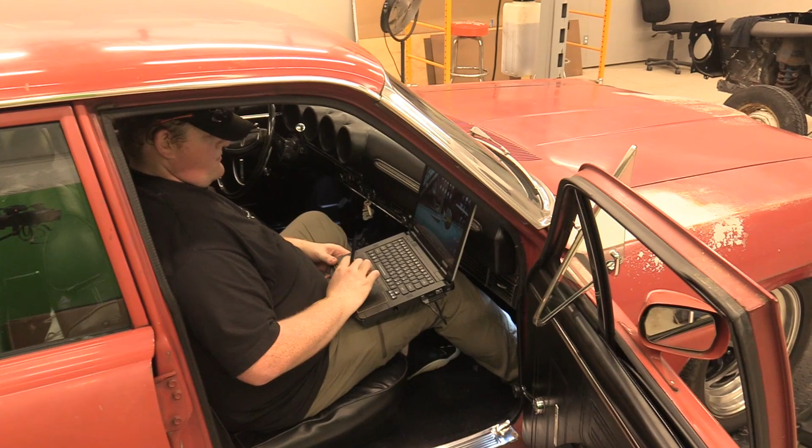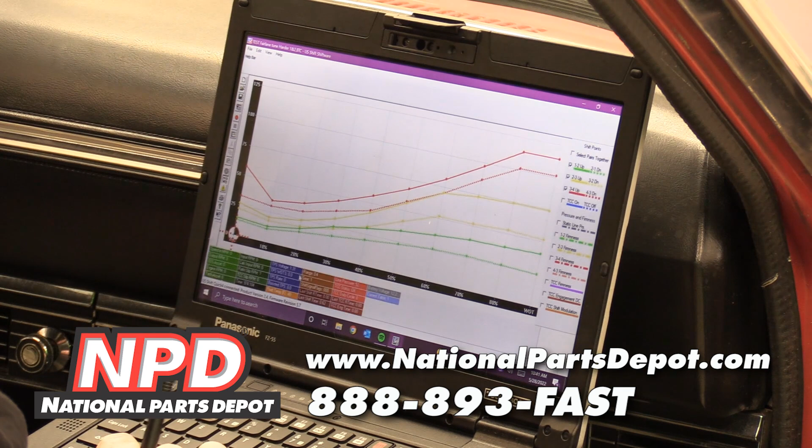All right, so I've driven it some more. It's kind of like a Cadillac. Yeah, it rides soft. It's like a cruiser right now.

Is there anything we can do to make that better? Already done. What? That easy. Holy cow, can you talk about this? I can try, I'll try to sound intelligent and talk about it. I don't know about the intelligent part, but can you talk about it? Yeah, I can talk about anything.

I already flashed you a new tune. It should make the better sounds, go faster.

I slapped the keyboard. Yeah, I saw you slapping the keyboard. I thought you were mad at it. Nah, you're doing a Hollywood thing, right? Yeah, I'm making the tune mad. It's gonna have a mad tune, it's gonna be nasty.

So what do you need, me to just pull it out on the counter here on the hood, or do you want to sit in the car? Let's go up to the hood. That'll be fine because you got enough cable, right? I don't need to hook to the cable. Okay cool, let's go.

All right, so I see line graphs. Yes. What am I seeing with line graphs? So these are your shift points at certain RPMs and throttle position. What's the order, is green first? Yeah, if you look on the right side you'll see a legend of all the lines, what each one means.

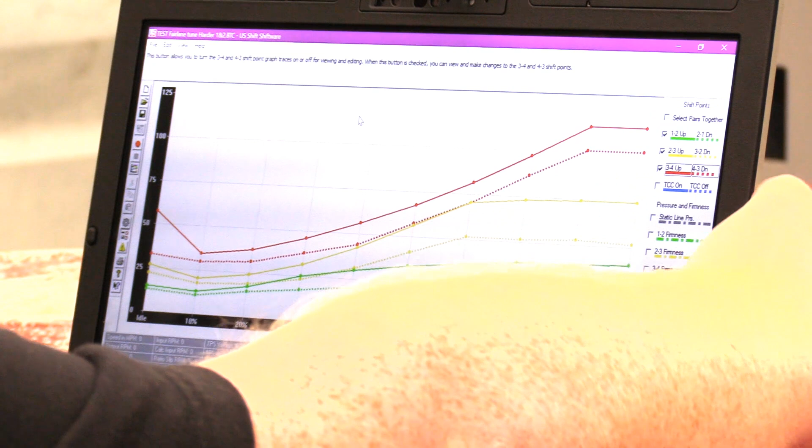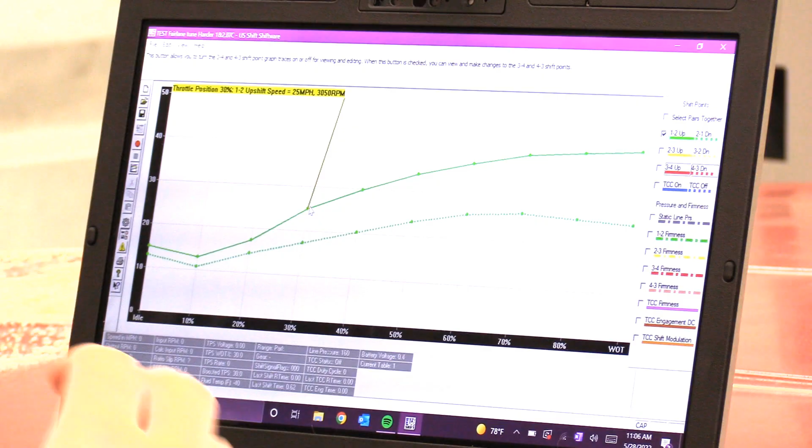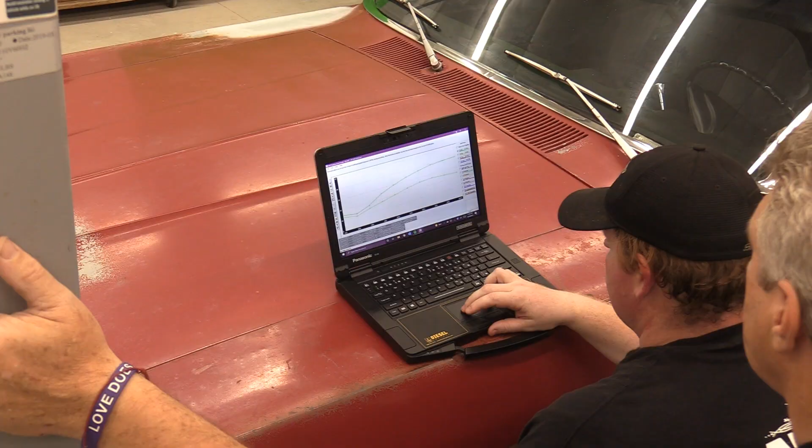Wait a minute, this thing doesn't come with preset tunes? It does, yeah, but it's a soft tune. So let's go ahead and pull up the original one. At 30% right now I've got it set to shift at 25 miles per hour, which is 3,050 RPM. So let's pull up the original tune and see where 30% is.

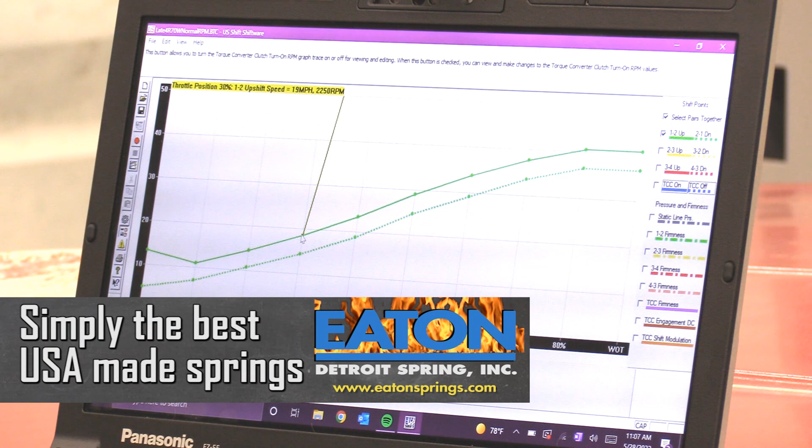All right, so at 30% it's shifting at 19, at 2250. So I moved it about 800 RPM up. And I did that with the entire line above 30%, and I just kept it linear, I didn't really do exponential.

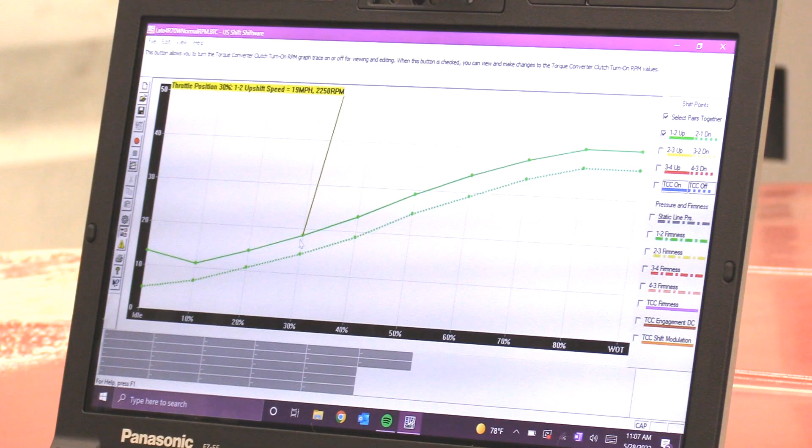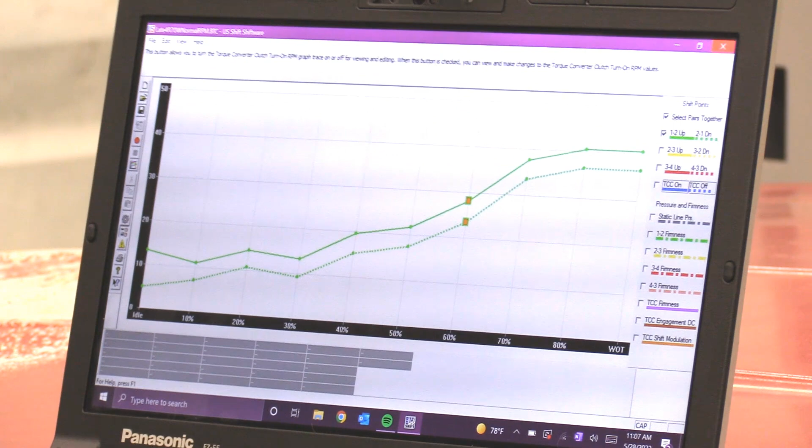An exponential line would be something along the lines of this, which would shift like absolute shit, but a line where it curves up steeply rather than straight across. Okay, don't do that, that's horrible.

But let me open up the old tune, well the new tune. And you can save as many of these in there as you want, right? Yeah, you can put as many tunes in, make as many copies of this as you want, make as many tables as you want. Well, the controller can have 4 tunes on it at once.

So you can have one safety tune, which is the factory tune, which is what I'd leave on there because we know it, and that's the Cadillac cushy tune. Yeah, and that's table 1, that just works.

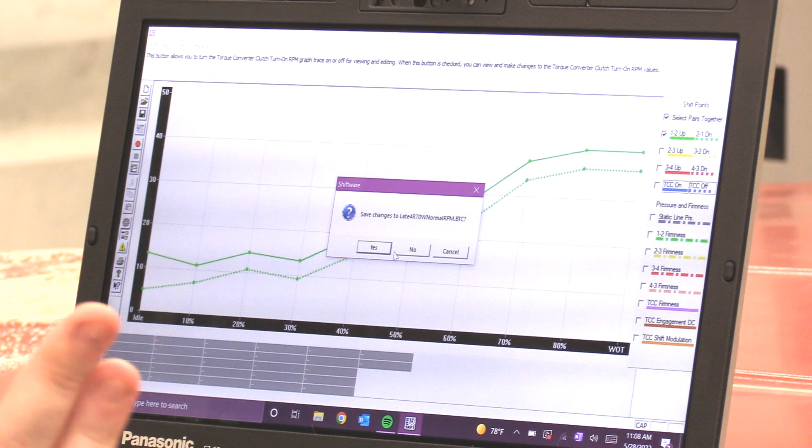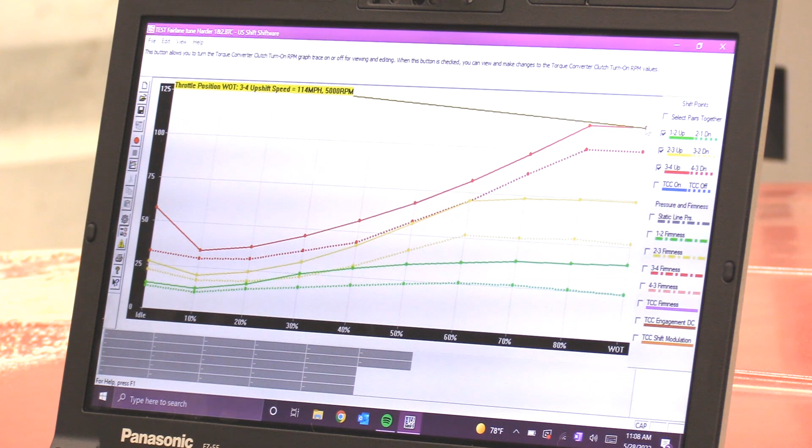But you could have semi-aggressive, really aggressive. They even have one in here that's a drag race tune that's basically- well, you can have drag race mode. Right, which you can ground a wire or do a couple other ways to trigger it, but that makes it shift only at the wide open settings. So you only want to use this doing a burnout or dragging it, which is really good for the clutch packs and all in the transmission, but not really good necessarily for the rest of the drive line.

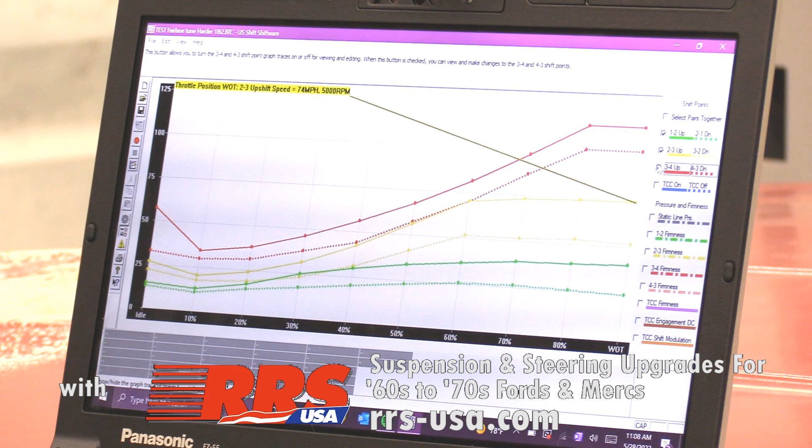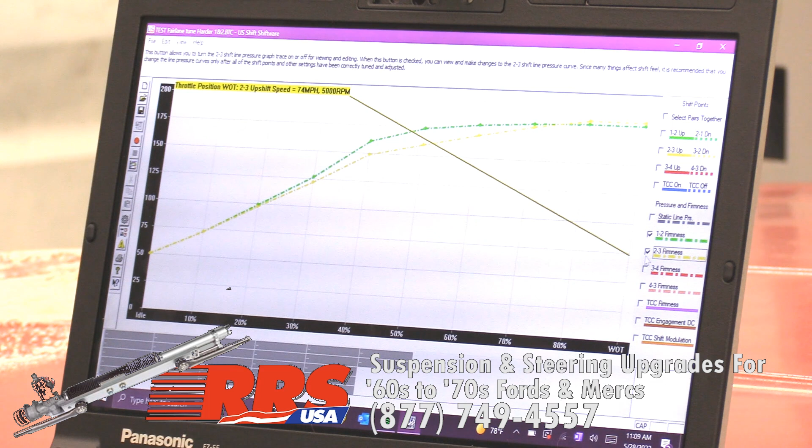Well, the clutch packs and everything, that actually comes in with the firmness. Right, so besides the upshift lines, you can also select 1-2 shift firmness, 2-3, and 3-4, and also downshift firmness. So I haven't really messed with this too much. This is what's commanding the line pressure while you're running. Right, the higher the line pressure, the harder the clutch engages, then the better for the transmission long term. The longer the clutch is meshed, the more wear, the more heat, and the more degradation to the clutch packs, which is why you want a little bit snappier shift in a performance car anyway.

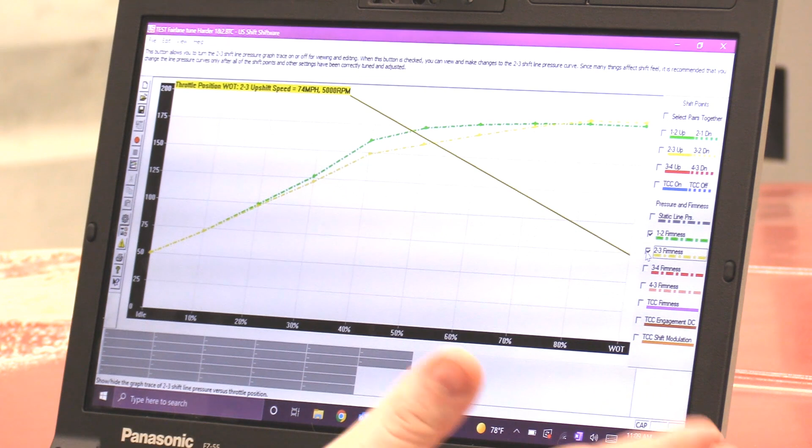You don't want it to feel, like I said, that's the only thing I don't really care for how it's set up right now, is just kind of a Cadillac shift. Yeah, so you can't even really tell. And the way I set this one up is I left 10 to 20% because when we were driving the other day, I noticed most of the cruising we were just around 10%.

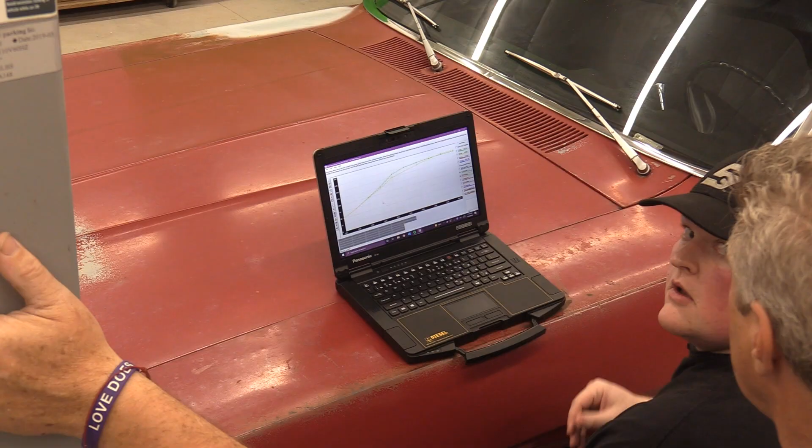So I want it to still be soft there and manageable, not super aggressive when you're just driving around. But whenever you nail it down, I moved above 30%, because that's really where you're trying to get into passing gear or take off the line and just get moving. So down low when you're just cruising around, it should operate just like the other one.

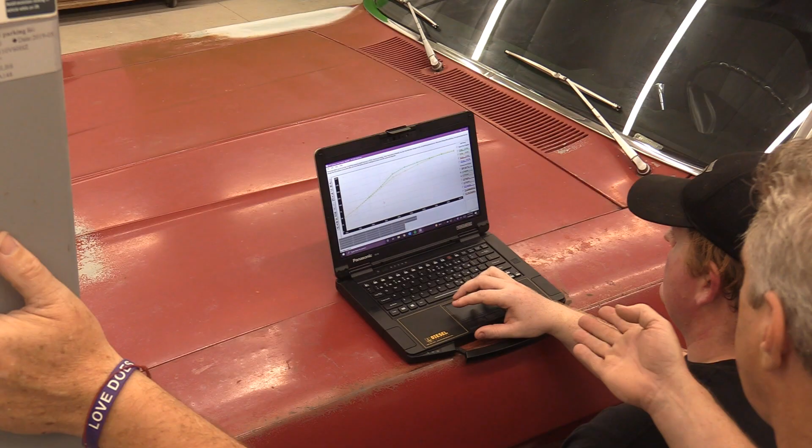Now, if a guy didn't want to go in and do his own tunes, could he go out and get tunes from US Shift, or are there other tunes offered within the program when you get it for your laptop? Yeah, whenever you download it, you get all of these. Pretty much every transmission that shift controller will cover is in here. There's different options for different transmissions. Most of the time for the 4R70W and the AODs and all that stuff, you only get RPM adjustments.

You have diesel, 5,000, 5,500, and 6,000. So a diesel tune is going to be shifting around 3,000 RPM, then 5,000, 5,500, 6,000. That's really cool, so you can set it up by RPM if you're wanting something more performance oriented. With a higher revving engine like this one, you'd want to go with a little more RPM because it's a Cleveland. Now it's got the 2V Aussie heads on it, so it's not as bad as a 4V Cleveland. Yeah, you need to get more RPM out of it to get more performance, since there's a mid-range, high-range power band in this engine.

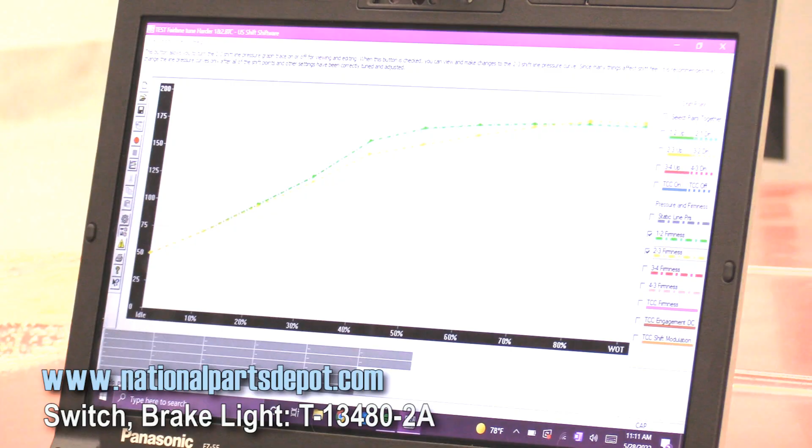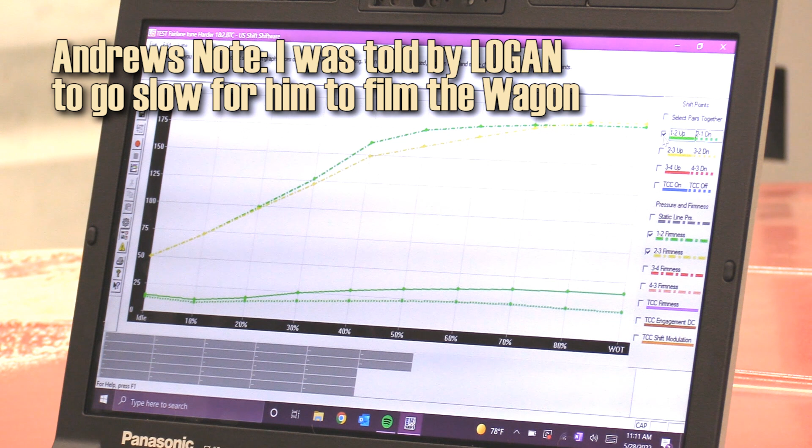So then you can go in after that and basically change the line graphs on all your shifts. Yep, and mess with it, and you can do it almost real time because you just pull over on the side of the road if you wanted to, and just flash it to the controller. Personally, I wouldn't have the engine running or anything, I'd do key on engine off and then key cycle it afterwards. Select your table on the controller, and you're good to go.

Awesome, so let's put the one in there that you've got, and we'll see what it does. We'll take it out and do a little bit of a drive and see what it does, and then maybe we'll do even more, who knows? We might be doing this until 5 o'clock tonight. Might just take that line and go.

No, no, make the tires go.

No, no, no. All right, so we are now fixing to go out and do a test run. Same thing with the mic this time, we're trying it a little different, we'll see if it makes a difference.

Down around 15 or 20 still. Yeah, this is table one, this is the same table. Oh, this is the original table, okay. And right now it probably wouldn't be moving much anyway. Help if I put it in drive. It does help.

Let's just get it up to temperature, and then we can do a 1-2 at decent throttle, see how it feels, and then we'll switch tables and do a 1-2. Okay, so we're going out and driving it with the original tune just to kind of get familiar with it again and feel it.

We do have a little bit of a vibration at about 65 miles an hour, so that's something we're going to be dealing with down the road here. We think it's probably a tire vibration. We're going to talk about that in another episode.

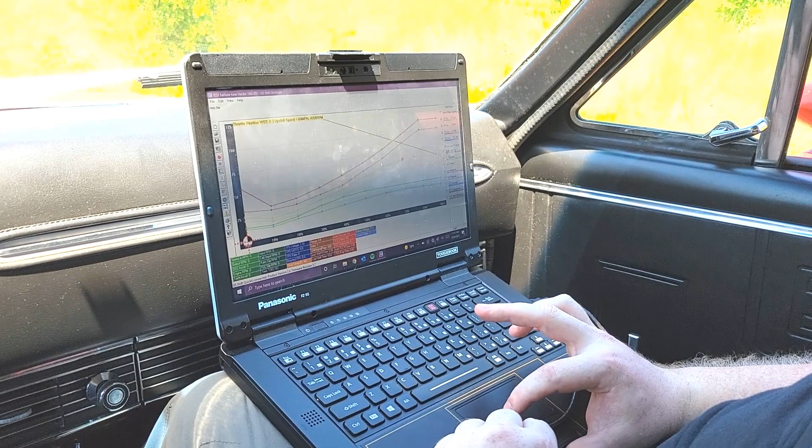The thing I like about this is it's really easy to muck with. He's over here just mucking around with it on the laptop right now as we're sitting on the side of the road, almost being run over by every car that passes.

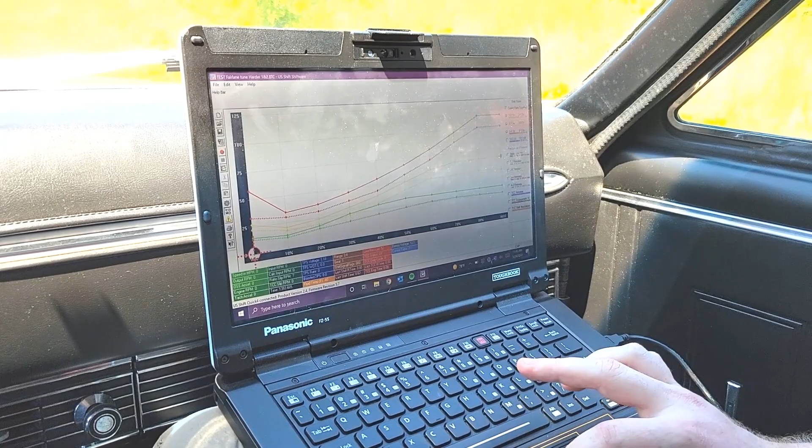All right, we're going to do it again. That started way too easy. I'm worried now, it didn't even burp. Usually this thing's more persnickety than that. Oh, God, I love those freaking tires in there. It's the price of success. Price of pretty.

Yeah, that's better. That's more like what a C4 would feel like. 2's a little soft, yeah, still soft. But all we're really showing you with that - I'm not going to sit here and bore you with us doing this all day long, because we could literally do this all day long. We're going to go through and do this off camera, but we'll come back and talk about exactly what this means. It is just dynamite to me. I love the fact that we can go in and screw around with all these parameters so easily.

So what do you think? Moving a line, there we go. We've been doing this all day. We've already been doing this all day. You were saying? You start doing the movie typing.

Well, what I was going to say is I love this thing. I really do like what we have with the US Shift system and the ease of being able to go in and fix it. And if we don't like it, we can just go back to table 1 and we're good to go. Yep, so always got to back up.

It's easy to tune. I didn't realize it was that easy - it's like just basically clicking on a spot and moving it up or down. Dragging it up, dragging it down. In reality, there's not really all that much of a learning curve with it, so it's something that just an average enthusiast with a laptop could take out, and he and his buddy could spend a couple hours really dialing in the 4R70W in their car.

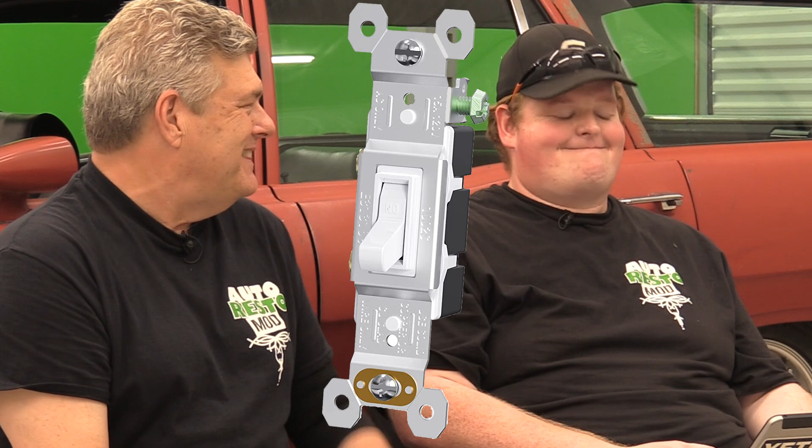It'd be off camera, talked about doing it with some household light switches. Yeah, I've seen it. Look like something out of a Star Wars movie where you adjust and set everything up. Get space - get those mil-spec switches, like the little rocker covers on them. They'll click, click, click when you open those up.

So I'm probably not going to do that. The idea of doing the push buttons on the steering wheel - the steering wheel in here is nice enough, but it's not a really nice wheel, so I'd be kind of tempted to maybe do that. If you guys are interested in seeing us do the mods to put this stuff on the steering wheel for the 4R70W, let us know. We will absolutely go into it and mess with it and make that happen.